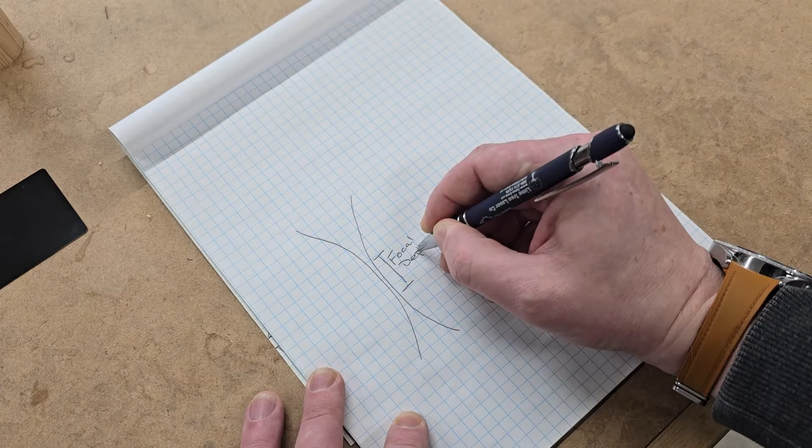Now, on a CO2 or a fiber laser, a non-3D, depending on your lens, this focal depth can actually be quite large. One thing we need to take into account is that with a UV laser, we have a very, very small focal depth. Now, with that small focal depth, we get an incredibly great level of detail, but we do need to remember that it is very easy to get out of focus with a UV laser.

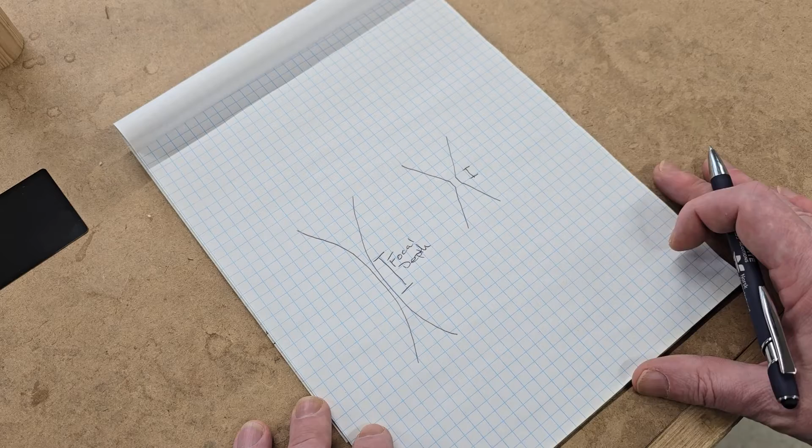On some materials, it doesn't make that much of a difference. On glass, this is critical - we have a very small focal depth, and we need to do absolutely everything we can to ensure that we're marking in the correct location. So that's just something I really wanted to quickly explain. I think most people do understand this, but hey, you never know. Some people might be buying a UV as their first laser, so this is something important to remember. We'll talk about it a bit more as we get to the laser, but just remember, when I say focal depth, this is the distance we're talking about here.

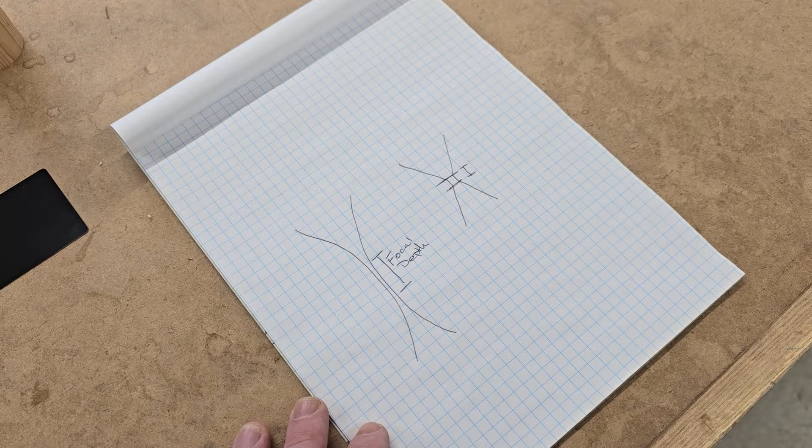Okay guys, hi, welcome to the video again. Let's get started here. We're going to start with something very simple - we're going to do the aluminum painted card that you may have received with your laser. If not, they're all over Amazon, very easy to find. It's a great way to really dive in and get your feet wet.

So first thing we're going to do here is, you'll notice we're working in our 200 by 200 millimeter workspace. We're going to do that for all three of these objects, so this entire video is going to be run on our 200 by 200. Now that gives us a 120 millimeter working depth - that's how much Z height we have to work with. We'll be doing everything at 0.

We don't really need to worry about working depth at the moment, we'll get into that. So let's get started - first thing we're going to do is import a graphic here.

And we've got a nice Haotian logo right here ready to go. We're going to resize it first - let's just do 50 millimeters by 57, that ought to work just fine. Anytime you're working in this software and you see an apply button, always hit that to double check on things.

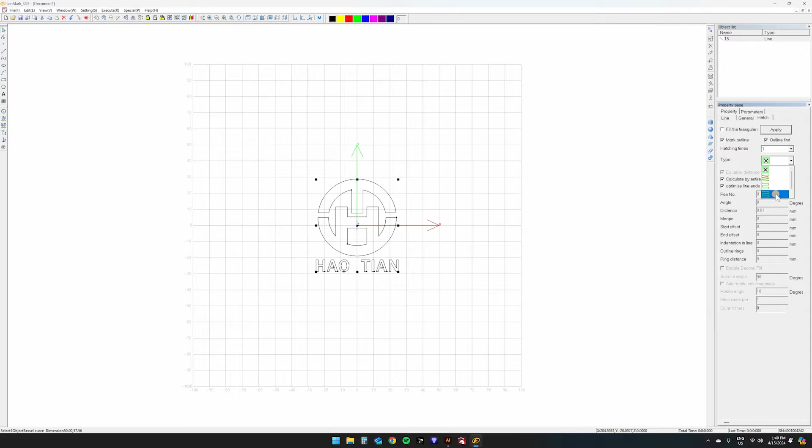Now I'm going to quickly set my parameters here, and then we'll talk about how to set it up properly. With this I'm going to do 2000 millimeters per second at a frequency of 60 and a pulse width of 95. I run my laser with an inverted pulse width, so that 100 is full power and 0 is no power. I think a lot of people don't use the inverted setting, so your numbers will likely be different. I just prefer it this way, it's easier for my smooth brain to figure out.

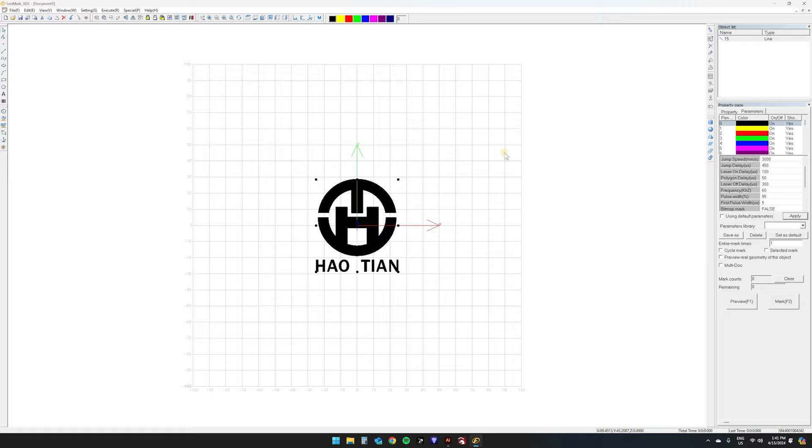On almost any other software not using a 3D laser, you'd think you're essentially ready to go now. We are not. Because we're using a 3D laser, if we rotate around, we can see that 120 millimeter working depth I was talking about before. The way these lasers work, we always want to start at the top and work down. You can technically do it from the bottom up, but I find that confusing, and focusing is a lot easier doing it this way.

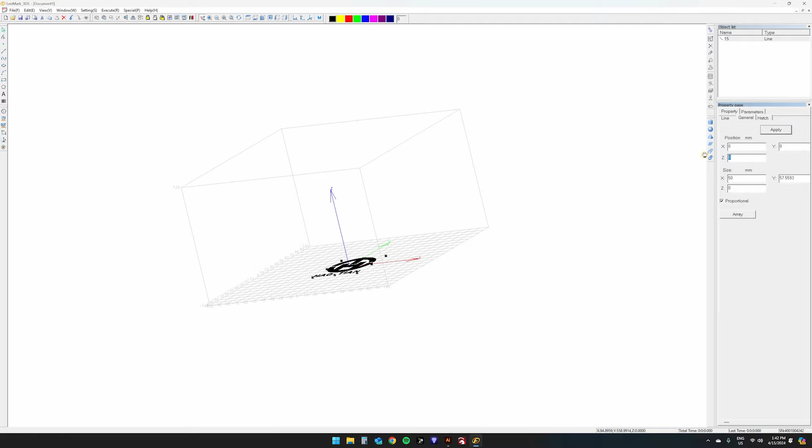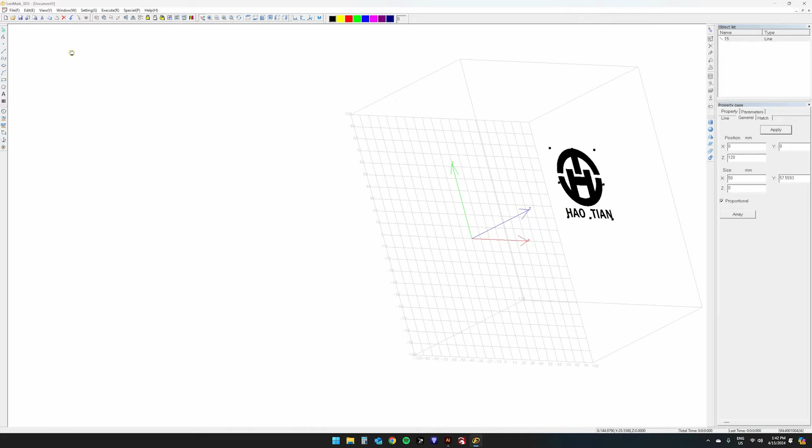So what we need to do is move our graphic all the way up to the top of our box, which we know is 120 millimeters. Let's go to our properties, into general, and set our Z height at 120 and hit apply. Now you can see we're right at the top there. So now when we focus, using the focus distance written on the side of the laser head, we can focus directly down to that highest point. On a card, the highest and lowest points are the same, but this is something you need to remember when we get into the 3D stuff, which we'll be doing right after this.

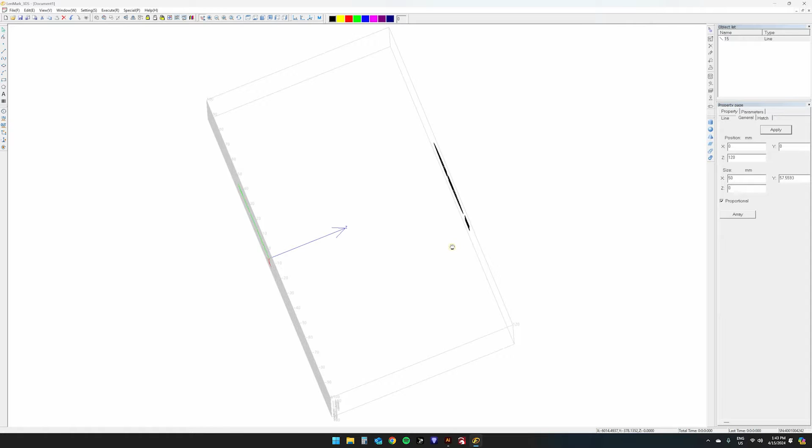So we're good to go. We've got our parameters set, we've got our hatch set, and we've moved the graphic in its Z height all the way up to 120 millimeters. So let's head over to the laser, focus it, and run this engraving.

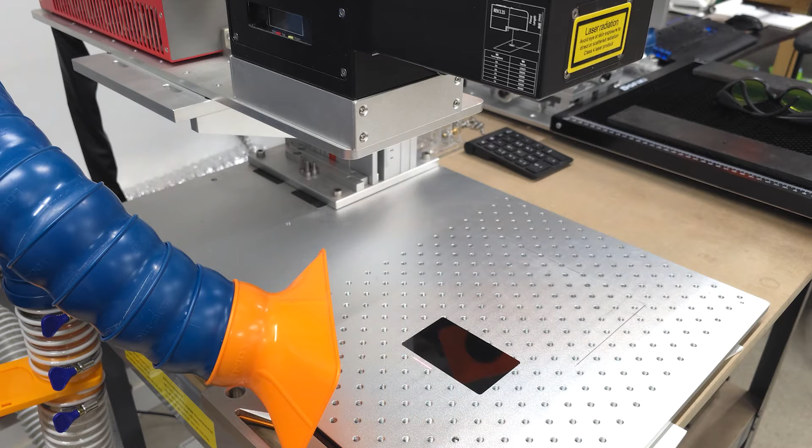Okay, we're at the laser. We have our card ready to go. First thing we need to do is focus our lens to the card. I use these focus sticks that I've made, I've got a few different styles. With this card, you can measure.

Why don't we show that? You will want to make yourself some focal sticks, because here we can move the card off to the side and measure up to our mark on the bottom of the head. When you're using a 3D object or glass that's going to be directly under the lens, it gets really difficult to use a measuring stick, so you'll want to make a focal stick for that.

We can reference our chart here for our measurement height, and our 200 by 200 workspace requires a 234 millimeter distance. I'm just going to move it to the front so I can see it a little better. 234, there we go.

Now you can see we have our outline. It's a little difficult to see on this black card. These gels can help quite a bit. I'll have to give Dean a big thank you for sending me this. I believe it's a photography flash gel, but they work great.

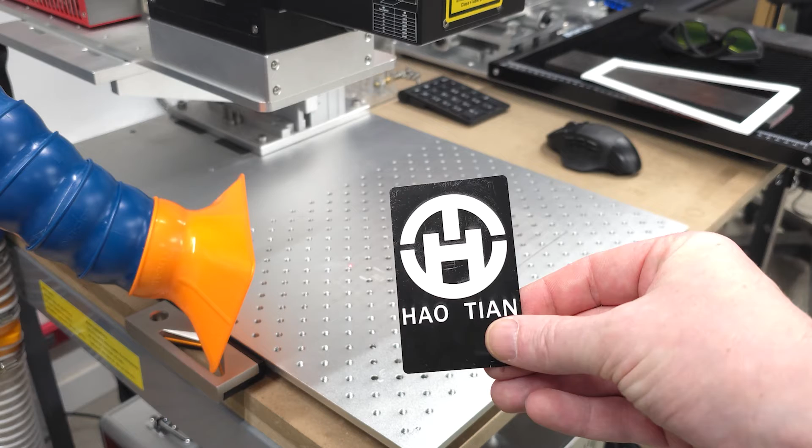Here we go. Pretty simple, not hard to do, like I said. Things do get a little trickier when we start moving into 3D objects, so why don't we do that. Congratulations, you've done your first engraving. Let's move on to the real fun stuff.

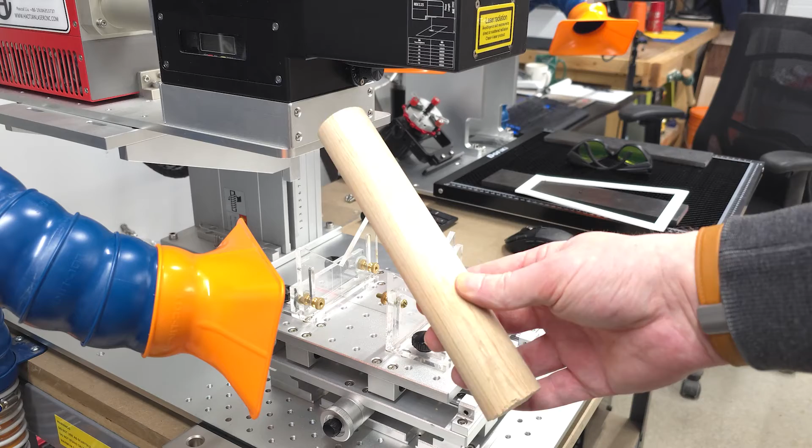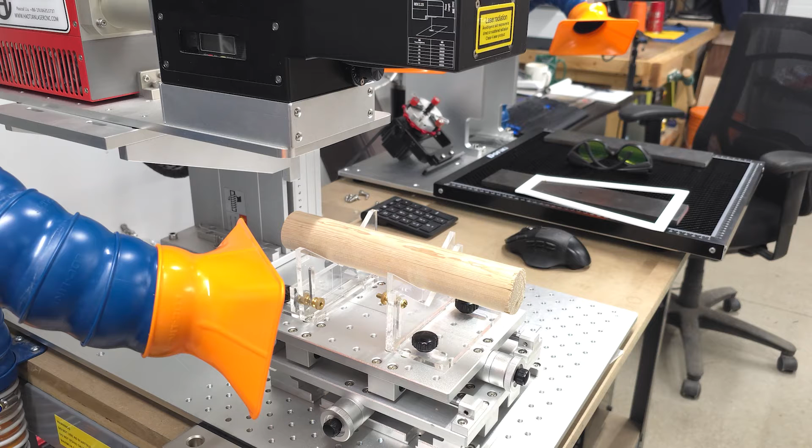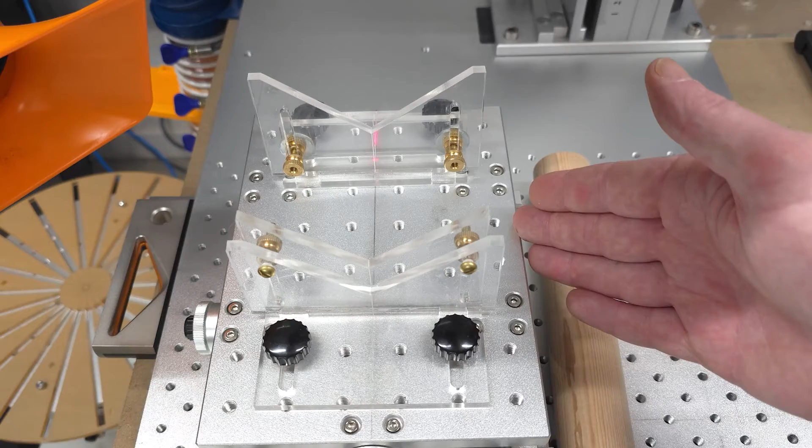Okay, moving on, next we're going to do a mark on this 1.5 inch diameter piece of hemlock dowel. Again, wood isn't quite as focal dependent as glass, so we've got a little leeway. But what I'd like to show you is that I'm going to be using this same jig setup for glass. You'll see I've got an XY table here, I've run a center line down it as well. You probably can't see them, but I do have center marks on the acrylic line here, and I simply projected a straight line and line-marked to line everything up with that.

We'll talk a little bit more about why that is so important with glass. Wood, it's not quite as detrimental, but it's a good practice to always make sure everything is as centered as possible when you're working with a 3D laser, and in particular glass. Like I said, we talked about that focal depth a little bit earlier, and with glass, that focal depth is extremely important.

So again, same thing we did before. We're going to focus the very top edge of our object to the lens, and this is where I say to use some kind of a focal stick. Again, I guess with this object, we can really pull it down a little bit and measure from there. Now, if this was not nearly this long and we needed it there, we can't really measure from there. So let's upgrade to our focal stick.

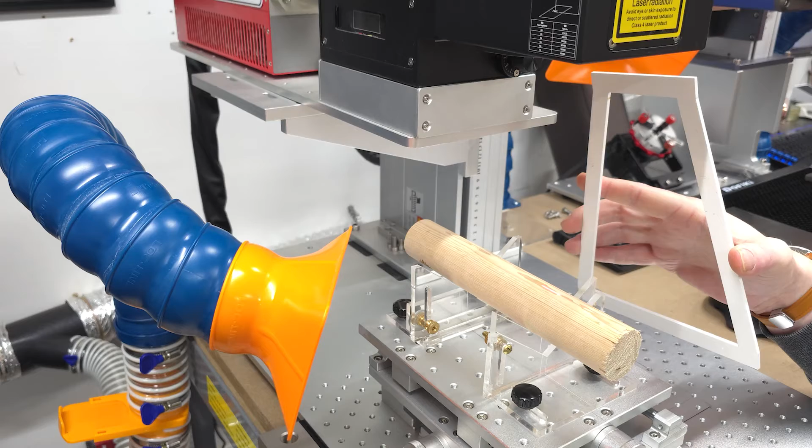Let's use that from the rest of this video. Move the head up. And focus to that top edge. There we go.

Now, I typically like to set my object in its place and get it ready to go before I move into the software. The reason for that is that you get a little bit better of an idea of your framing and everything. You want to make sure everything's in focus. It's very easy to hop over into the software, get everything set, start framing, and then things don't look right. And the reason for that is that you're not focused yet, and sizes will change when they're out of focus. So getting your object down, aligned, and focused first is just a good way to make sure that you don't skip a step later on.

So that's ready to go. Let's move back to the laser. Sorry, back to the computer.

Okay, here we are back in LenMark. I've just started a new document and just imported that same graphic. So let's get started again.

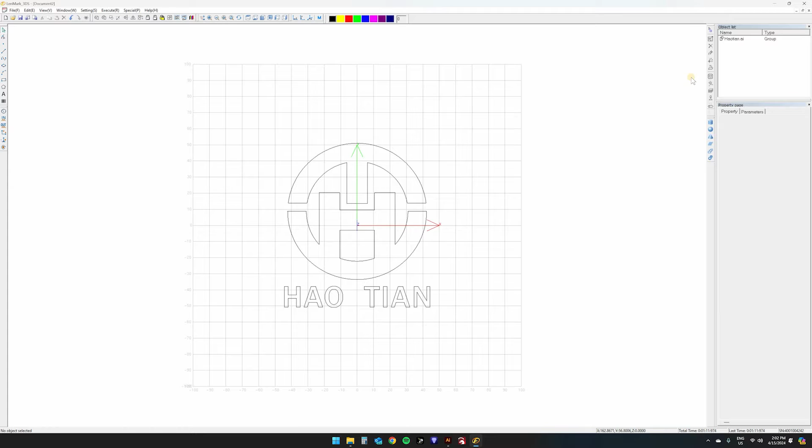First thing we need to do now is create a model to engrave on. We're using a cylinder, so we'll start with that. We're going to need a calculator because we're working in millimeters. So a simple cylinder.

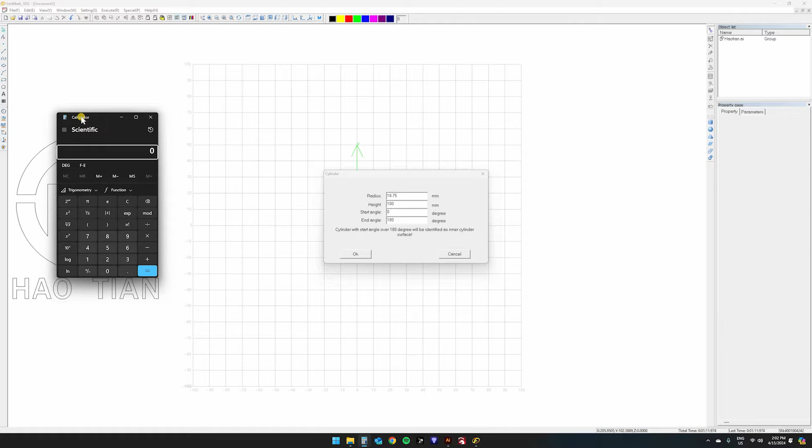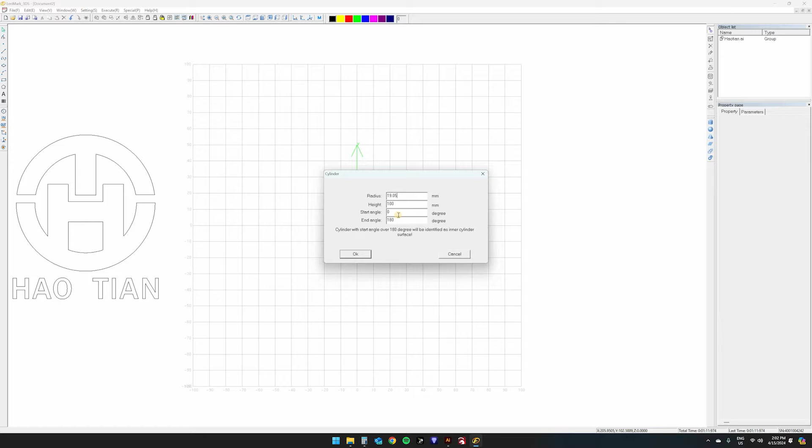Now, I said before that this was 1.5 inches. So let's get that into millimeters. That's 38.1. We'll divide that by 2 to get our radius, 19.05. For this particular object, our height doesn't really matter much. And I'll do a start at 0 and end at 180, so we only have half of a cylinder. There we are. That is our model that we will be projecting this graphic onto.

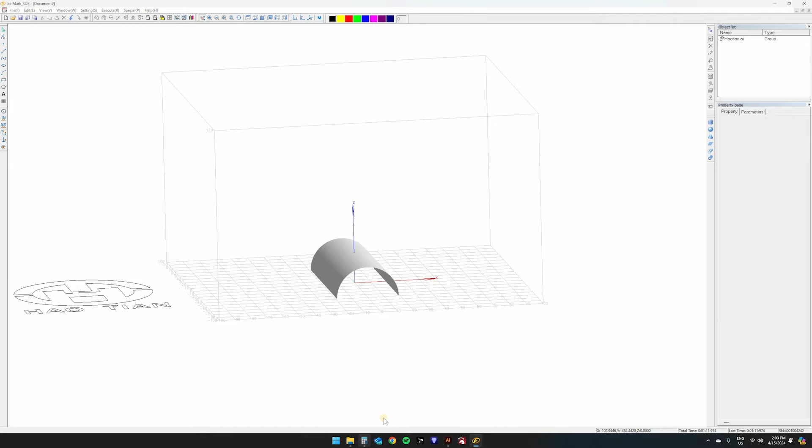Now, same thing. We need to move this up to the top of our working height. And we're going to have to put a little math into this one. Let's select it first. We can bring up our move window.

So we know our radius is 19.05. So let's just take 120, subtract 19.05. That gives us 100.95. That is the height we need to move this up to get it to the top. So we'll add that into our Z column. We'll click the relative position and hit OK.

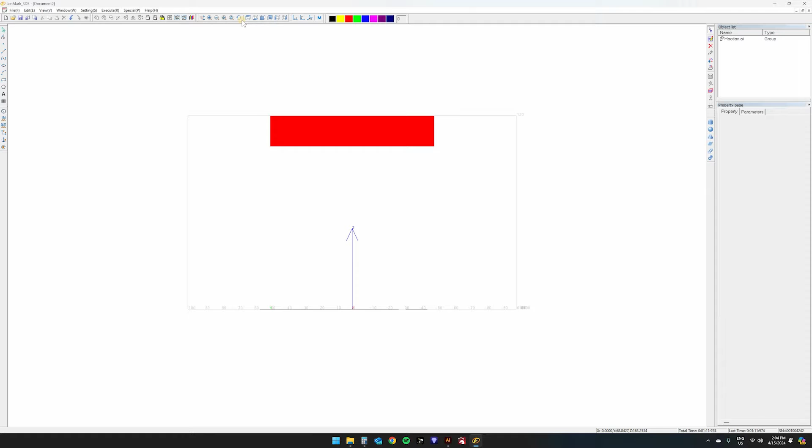Now we can choose a side view just to quickly verify that we did our math correct. The top of our cylinder is at the top of our working field. So we know that's good. Let's go back to our top view. We're going to select our graphic and bring it back down to the origin, which is 0x, 0y.

Now for placement, I usually like to bring it up to 120 so we can see it on top of our object. Obviously this is a little bit big, so why don't we move that down? Let's do, say, 75% of diameter.

So we have a 1.5 inch cylinder. We'll turn that into millimeters by multiplying by 25.4. So that gives us 38.1 as a diameter. And let's multiply that by 0.75. So that's a 75% diameter, which is a pretty common target for most cylinder engravings. That's 28.575.

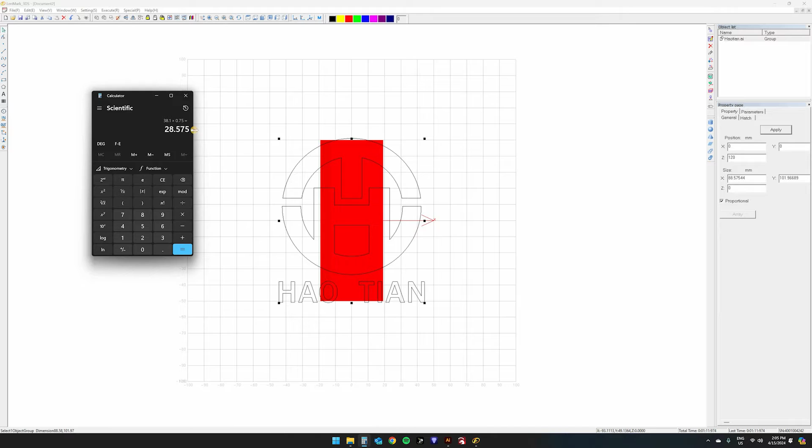So we'll resize this proportionally by that 28.575 and hit apply. That's looking pretty good.

Next thing we need to do is we need to hatch this. Again, I don't want an outline. I'm going to do a bidirectional hatch on this one. I find it works much better for wood. Again, all of the options selected, but this time we're going to do a 0.07 millimeter line distance.

There's a few schools of thought on this when doing 3D engraving. Some people like to do a 90-degree hatch, which would be this direction, so that the focusing lens, when you'll essentially be engraving the entire thing left to right, doesn't have to do as much work. It only really has to move in, then out, then back in.

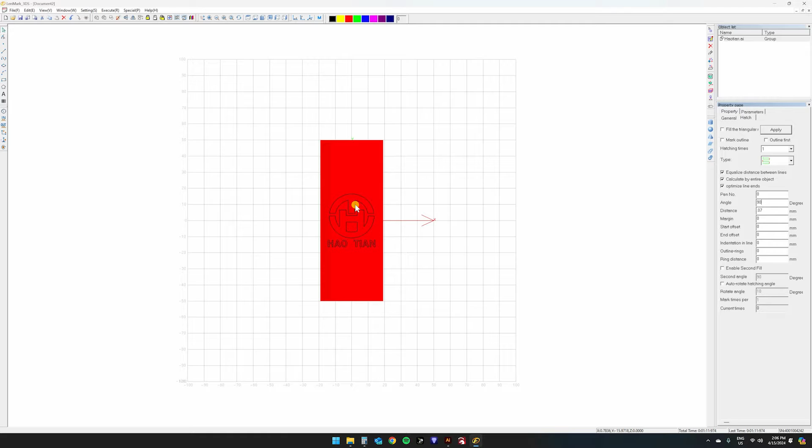If you're doing a 0 degree where you're moving, say, from bottom to top, your focusing lens on the head is going to be focusing in, out, in on every single path.

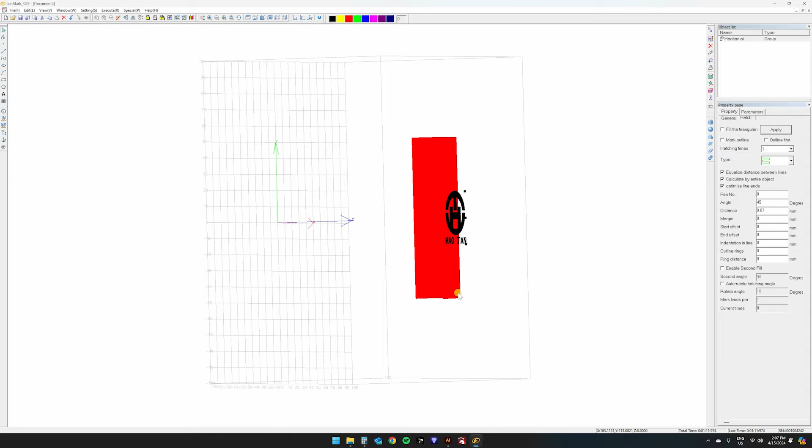Now, this is one of the common problems Mark has been seeing when we're projecting a graphic onto a cylinder. It's a little different when you're using these tools. You can actually project from that 120 height. When using imported models, you always have to have the graphic down at 0.

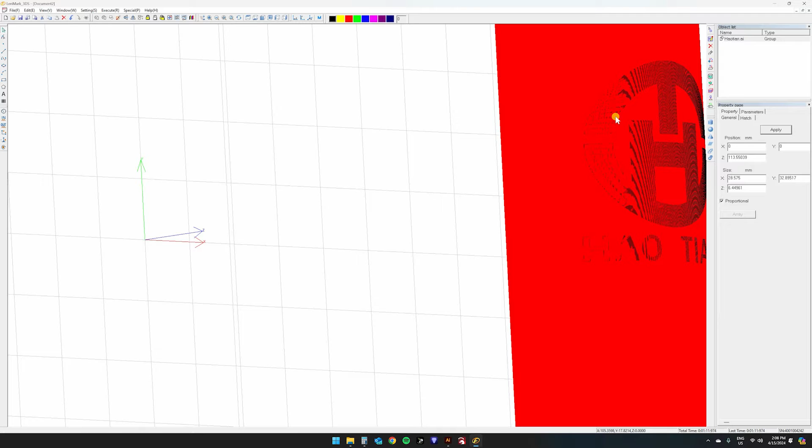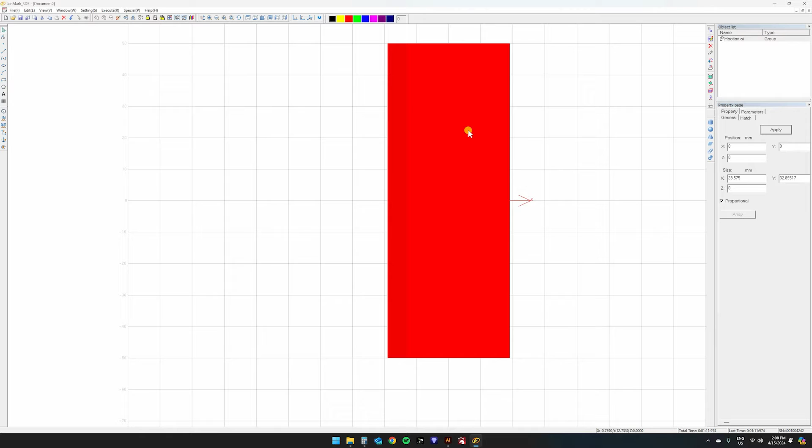And to be honest, whenever I'm doing a projection onto a 3D object, I always just start at 0 anyways. You can still use the wrap feature, or you can also use the straight projection, which will essentially—again, it's kind of hard to see—the difference is that this projection mode essentially projects it straight down. So you'll see, again it's kind of tough to see, but this is starting to stretch out from our original width up here. Whereas if we do the actual wrap, it's the same size. So essentially it's taking the graphic and shooting it straight down. So if you're looking at this object with your eye from this space, you will see that exact shape.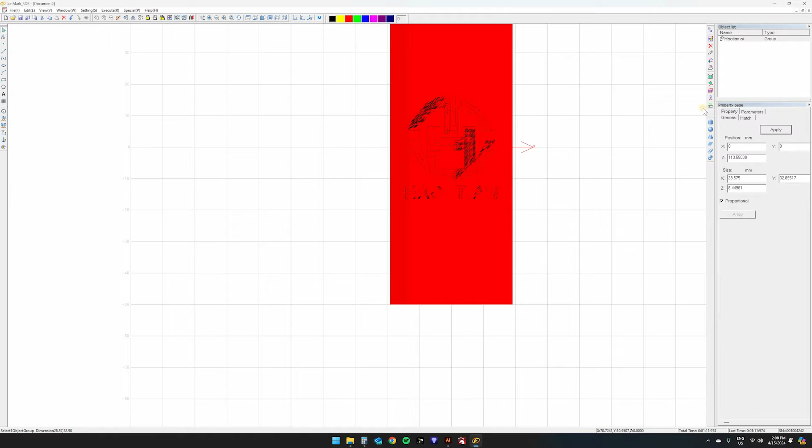So I'm sure a lot of you know that when we're doing circular objects on a wrap on a cylinder, we start to get that egg shape. So we correct that by stretching our circle out into an oval, so that when we engrave it, we actually have a circle when you're looking at it. This straight projection mode is essentially just doing that for us. And if you're using an imported model, you'll have to use that mode anyways. So I use it most of the time. Sometimes I don't—it really depends on what I'm doing.

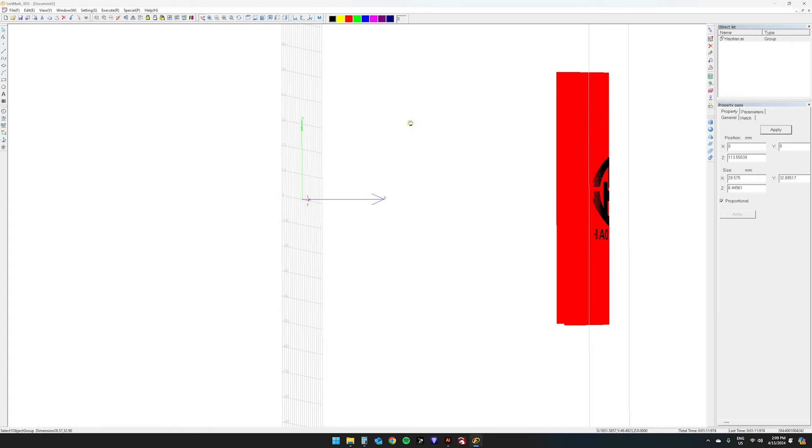So again, let's take a quick inventory. We've set our burn parameters of the Haotian logo here. We've projected it onto our cylinder. You can see it wrapping around. And we're also at the very top of our 120 mil working depth. So we are ready to go. Let's go back to the laser.

Okay, here we are. So again, we've already focused, we've already placed our object, we've got everything on the software set the way we want it. We can do a quick preview. Looks pretty good. Now I'm going to take this off of the tripod so we can get a better look at the actual engraving. Here we go. Let's fire away.

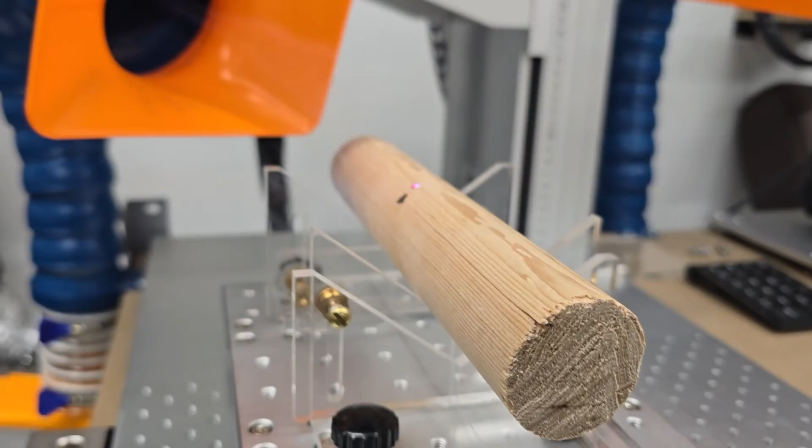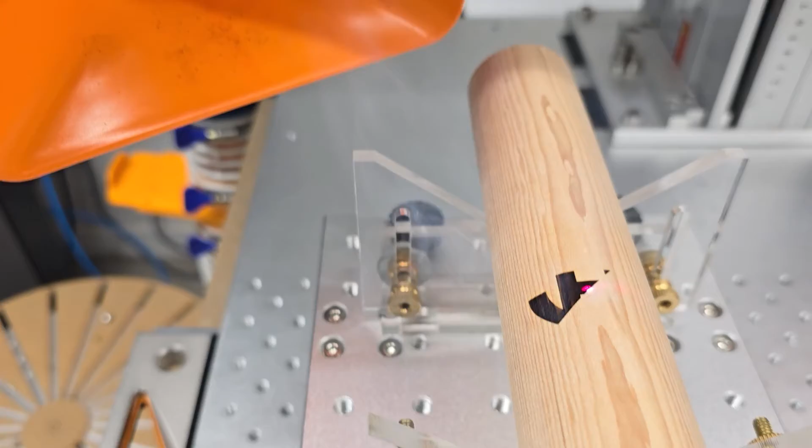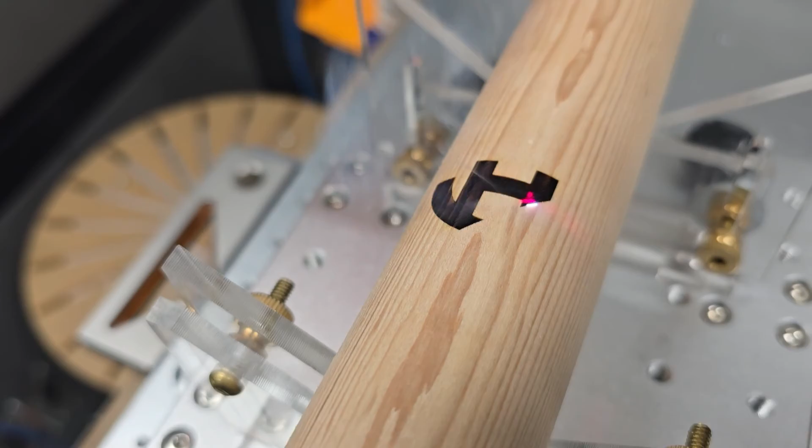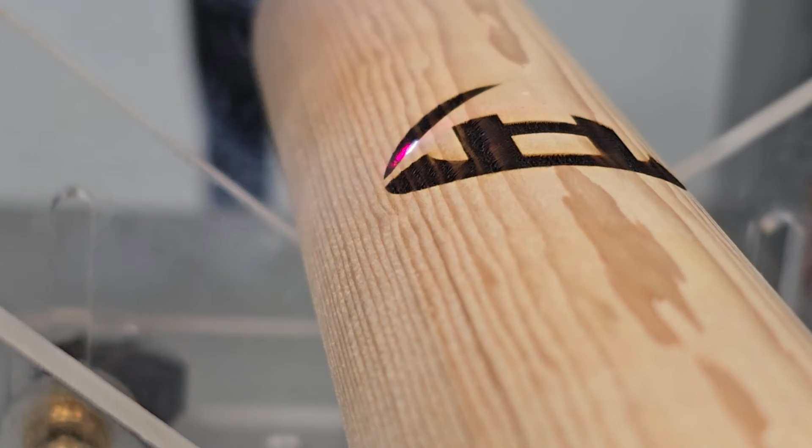Now again, I told you I like to go pretty slow with wood, but that beautiful black engraving is exactly why that could be tough to get with the CO2. I'm just starting to wrap around the other side now—get a proper focus. With wood, you really can go a lot further on the diameter, which is very easy to engrave with the UV laser.

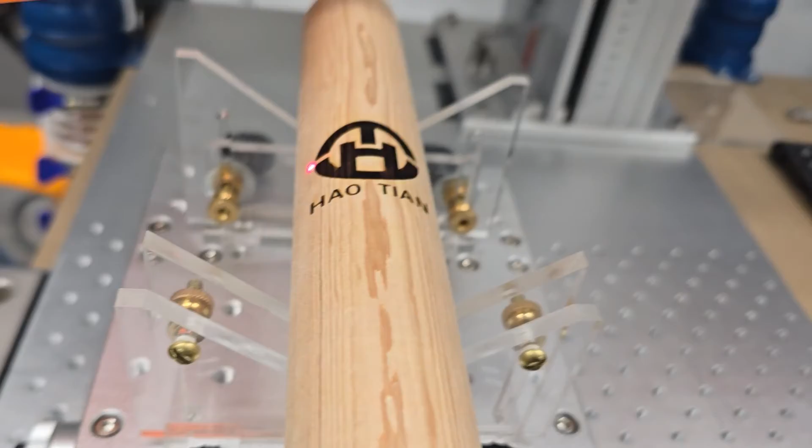Just a little bit of text left, and we're done. There we go, that's it. You can see we got that wrapped down. A little tough to focus, which is going to be a lot more fun to deal with when we do glass. You'll find out glass can be really tricky to try and video and engrave at the same time.

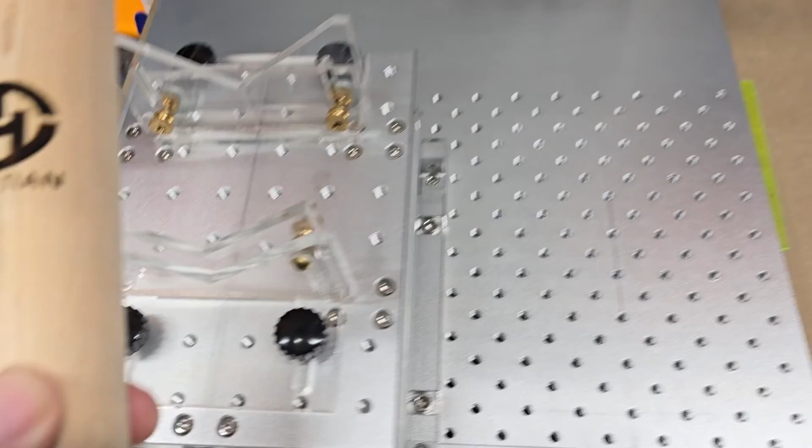Now here's what I'm talking about with those projection modes. You can see that the circle is actually quite a bit distorted when you're looking at it from the side. But if we look at it directly straight on, we have a perfect circle. So that's really just what that projection mode is doing. Again, play around with it.

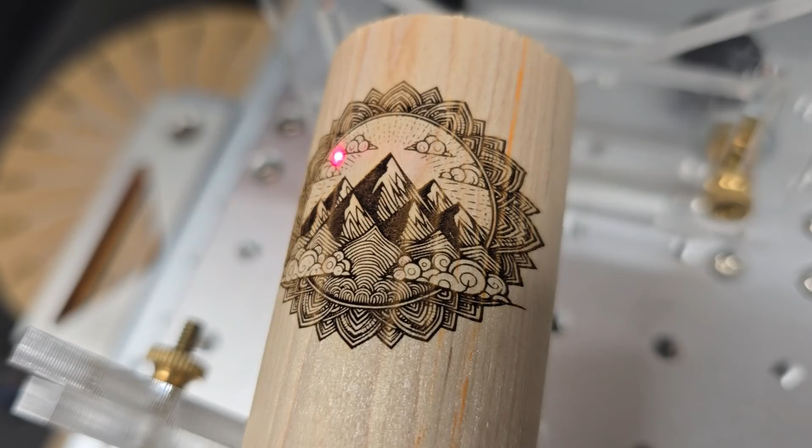So there we go. This dowel I just bought from Home Depot—actually it was in the trim section, so I was able to just cut off a couple of feet. It only cost me a couple of bucks. And I'm not going to lie, engraving these dowels is a whole lot of fun. Here's another engraving that I've done on it, and that really shows off the detail that the UV laser can get. It's the exact same process, same settings, same everything, just a different graphic.

So there we are. Congratulations—that may or may not be your first 3D engraving. If it is, good job, you're probably having a ton of fun right now. So let's move on to the real challenge. Glass can be tricky. It can be very tricky, and all of the things we've learned so far, we really need to take into account.

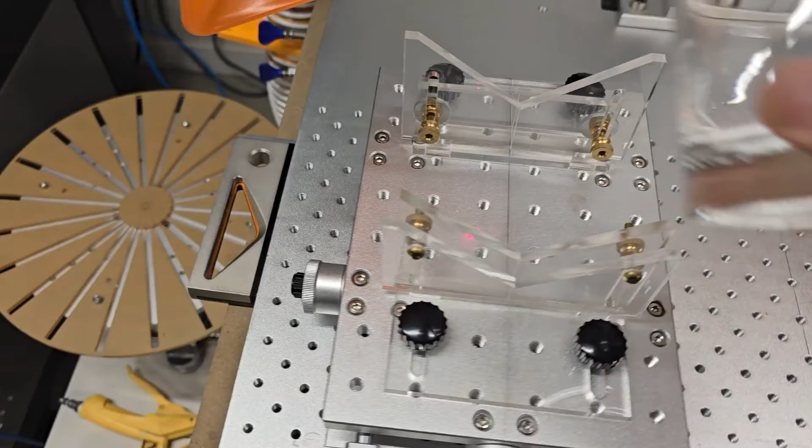Now, like I said, I'm going to be using this exact same jig for this glass. We're going to be doing a little bit different setup in the software, just a few extra steps, but we're still going to use cylinder.

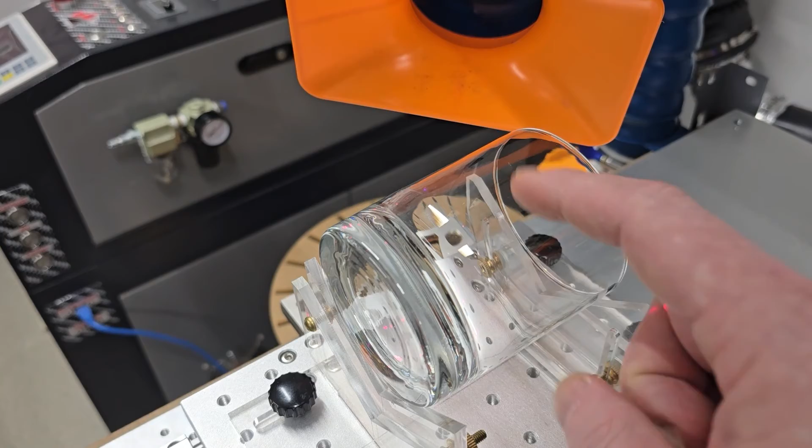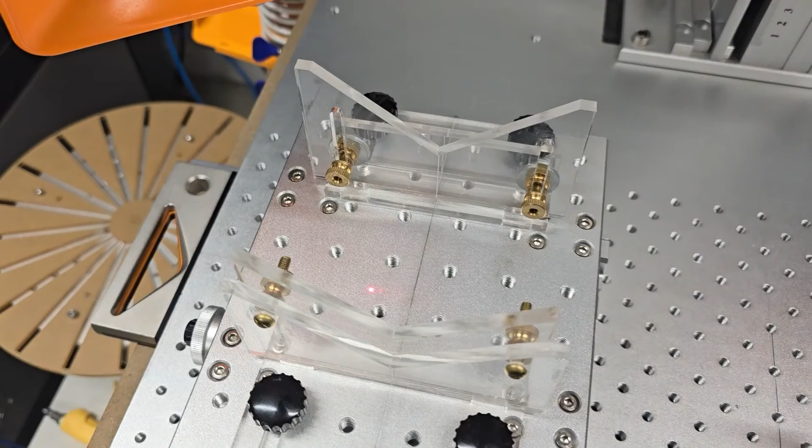Again, having your jig centered is critical. If you're using a proper cylinder, ensuring that this top is level is also critical. Now, I know that this is a cylindrical cup, and I know the height of these two standoffs are equal, so I know that this is level.

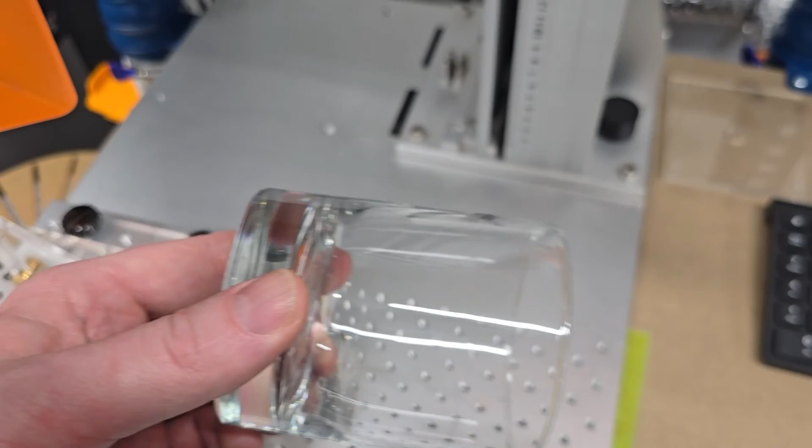Now, being level is only pertinent if this is a cylinder. If you have a tapered cup that has a smaller diameter at the bottom, we don't want that top level. We want to make sure the cup is straight. And there are many different ways to do that. You're going to have to find your own way.

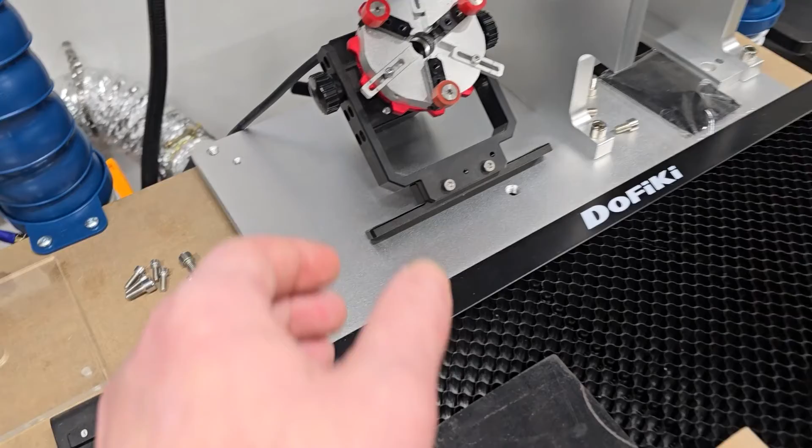I find using my grip rotary is a great way to keep things straight for tapered cups when doing glass. I don't actually use the rotary, I just use it to hold glass. But for cylinders, this works great.

Now I'll quickly pop this back into the tripod here. We're going to do the exact same thing. We're going to set our focus height, again with our focal stick.

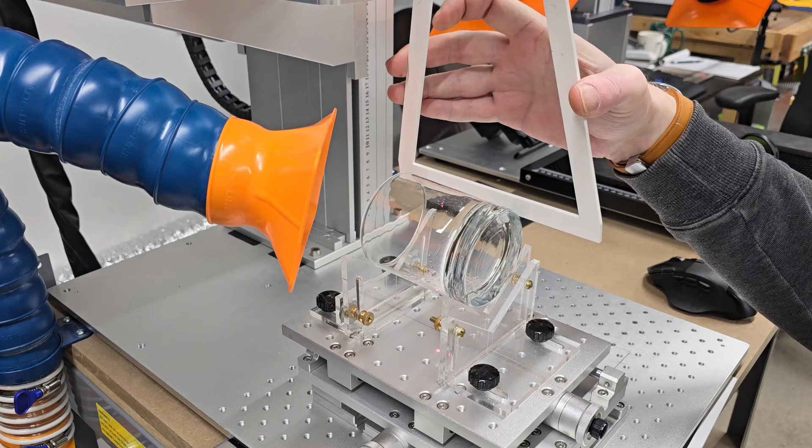Now, actually, I'm going to double check this because this is not looking like a true cylinder. It is not. There is quite a taper to that. So I'm going to reset. I'm going to set up with the grip rotary there, and we'll come right back.

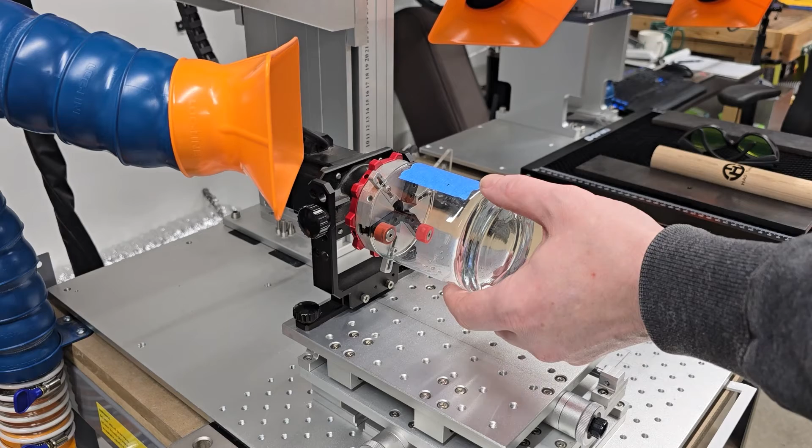Okay, we're back. So we've reset using our grip rotary. One thing I'd like to mention is that I have the head of my laser squared to this table. So what that means is that I can use my engineer square to ensure that the XY table is square to the table itself. And then I can also make sure that the rotary is square to the XY table. That's going to keep everything straight in both our X and Y directions.

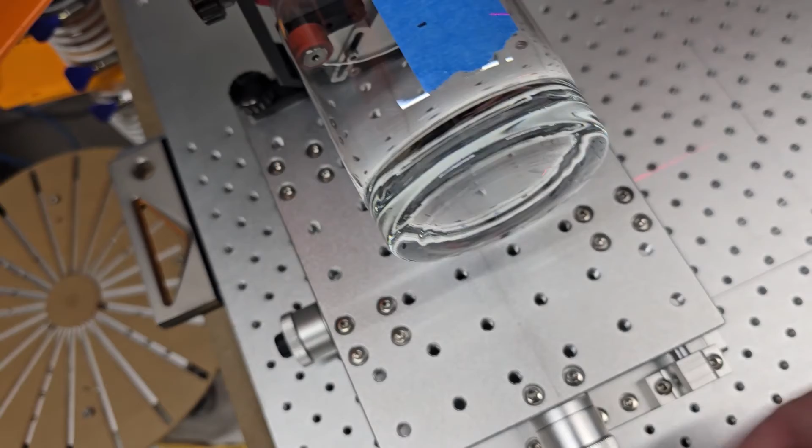Now, I know that this rotary is already centered in our X axis, but we do need to center the glass in our Y axis yet. So I just put a quick piece of tape onto the cup and mark its center line, and we're just going to move the XY table until our alignment cross lines up with that mark.

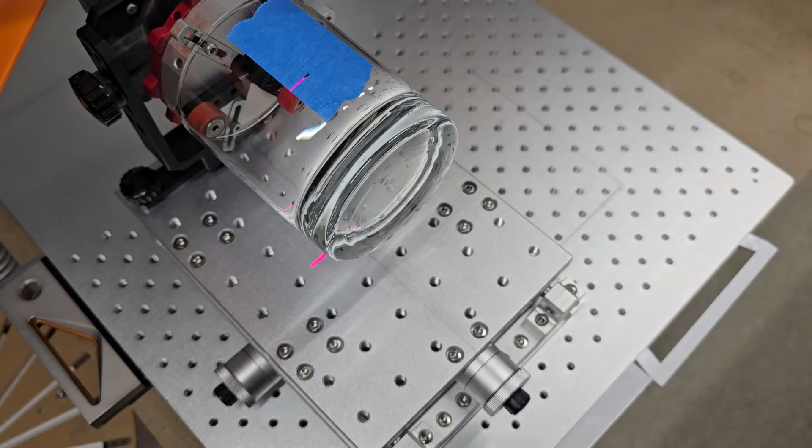So there we go. Our glass is centered in our X direction, it's centered in the Y direction, and let's remove this from the tripod again.

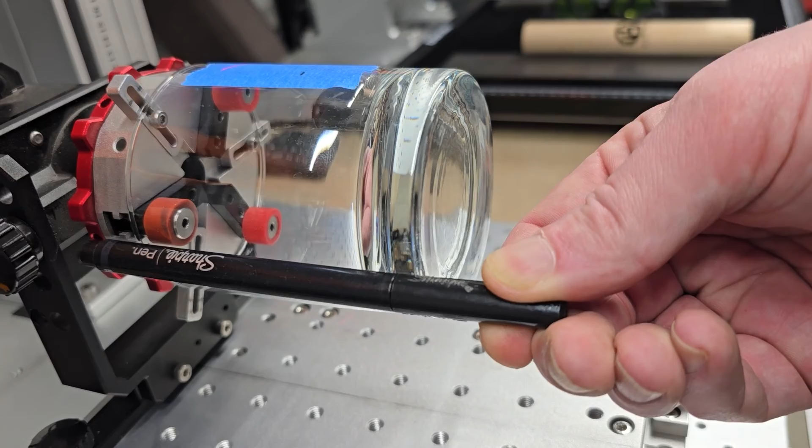This top edge surface is not level. The center line of the glass, better, the central axis of this glass, you can imagine going through the very bottom all the way through. This central axis is parallel to the table. That is the important thing with the UV laser. That's how our model is going to be set up.

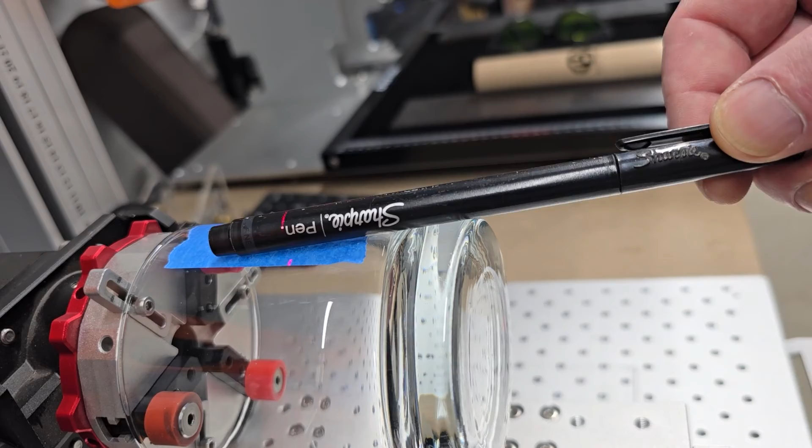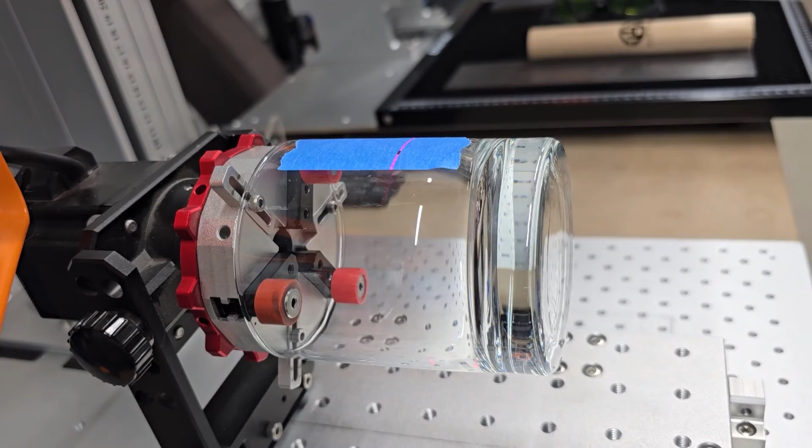If this top surface wasn't level, we also have to figure out how to rotate the model in our software to reflect that. That's a tricky process. I know this rotary is set up with a face square, which means that I know this central axis is also parallel to the table and will match our model in the software.

And again, we'll double check our focus to the highest edge, which will be at the top. There we go. Remove this piece of tape. All right, let's head back to the software and get this set up.

All right, guys, moving forward with our rocks glass engraving. So again, I've got a fresh file in Landmark. And the first thing we're going to do is create our cone. As I said, that glass did turn out to be tapered. Not by much, but it was tapered.

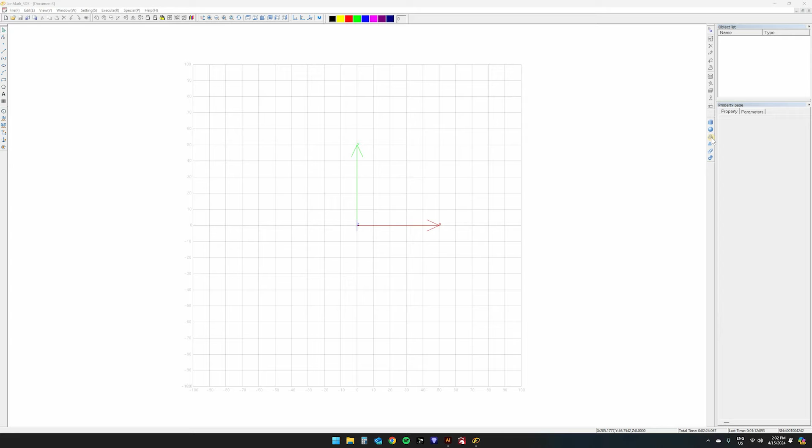And with the UV lasers, we have a very, very, very tight focal depth. And even though our top diameter and our bottom diameter are only 3 millimeters difference, that is enough that your engraving will fail. So take your time, make that proper cone, because that 3 millimeters, which is only a millimeter and a half in radius, it will make a difference.

Like I said, we're starting a cone here. Now I have my diameters, but we need radiuses, and as you know, your radius is half of your diameter. So we have a top diameter of 78, divided by 2 is a 39 millimeter radius for the top. The bottom we have a 75 millimeter diameter, divided by 2 is 37.5. And we have a height of 93.

We'll hit OK. There we go. We have our cone.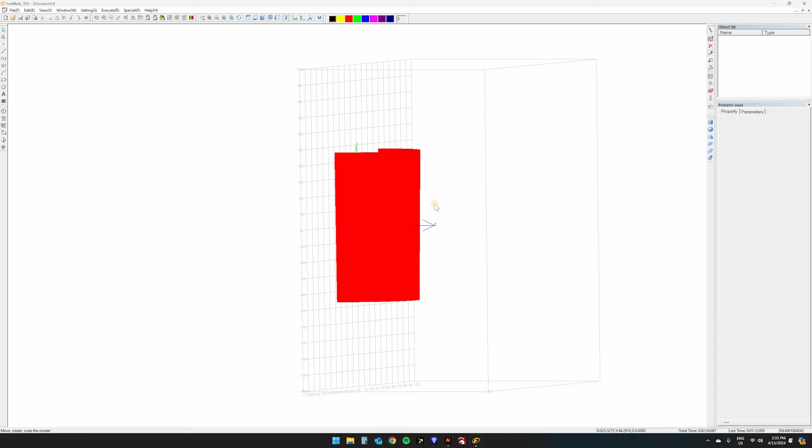So again, into the Z. I've already forgot what that was because I have the memory of a goldfish.

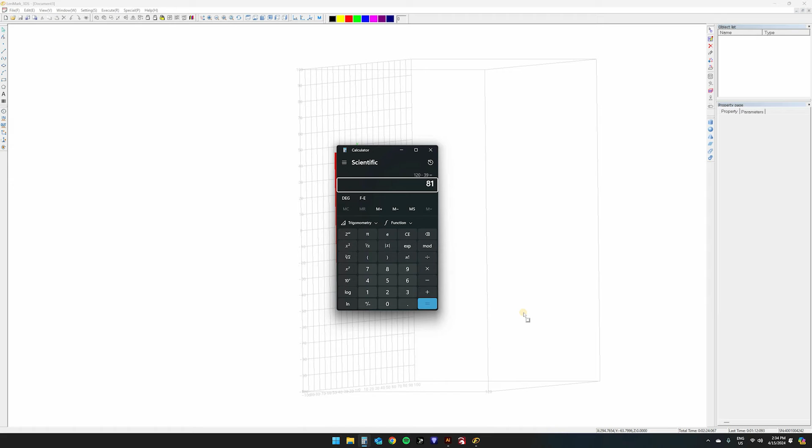Sorry about that. Top radius of 39, remember 81 this time. We are going to move that up by 81 millimeters relative. Again, you can do a side or back view to double check that the very top edge of your model is going to be at 120. So we're good to go. Our model is set.

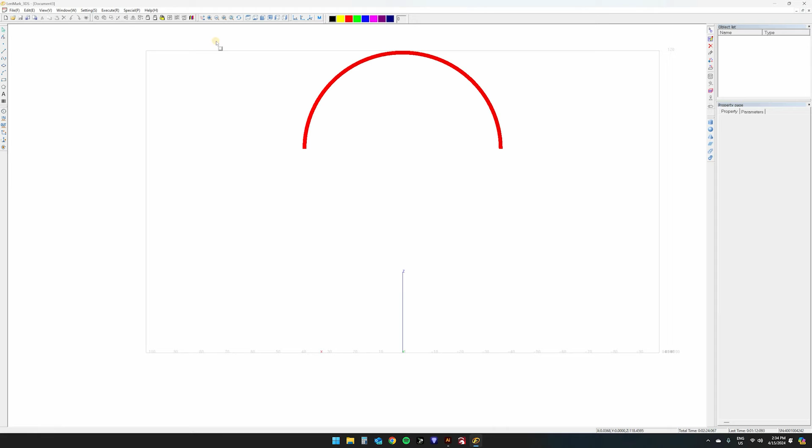So again, we'll import our Haotian logo, and again I like to always move it up to 120 so I can see what I'm doing. Now for this, we said we had a top diameter of 78. Let's target 70% for our width, so we'll multiply that by 0.7. That gives us a 54.6 millimeter width of the graphic I'd like to do. We'll just call that 54. We'll resize that in the X direction proportionally.

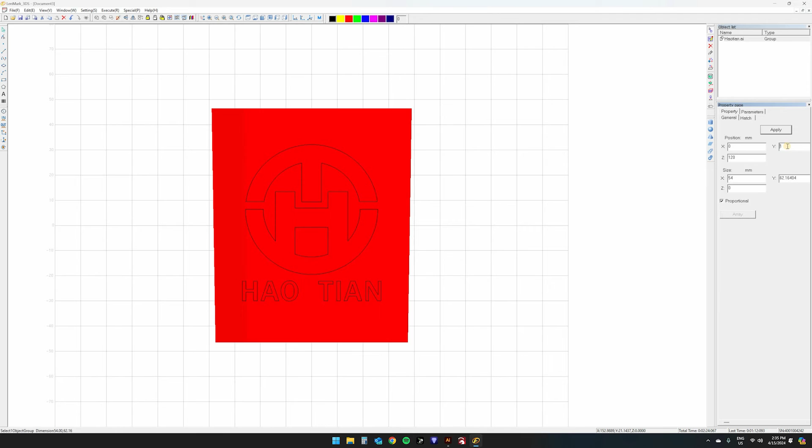We'll hit apply. Now this rocks glass has a very thick glass bottom, which is somewhere around here. We could actually measure it, but I'm not going to. What I'm saying is that it looks a little funny if you engrave over that thick glass bottom. So let's just move it up a little bit. I think that'll look quite nice there.

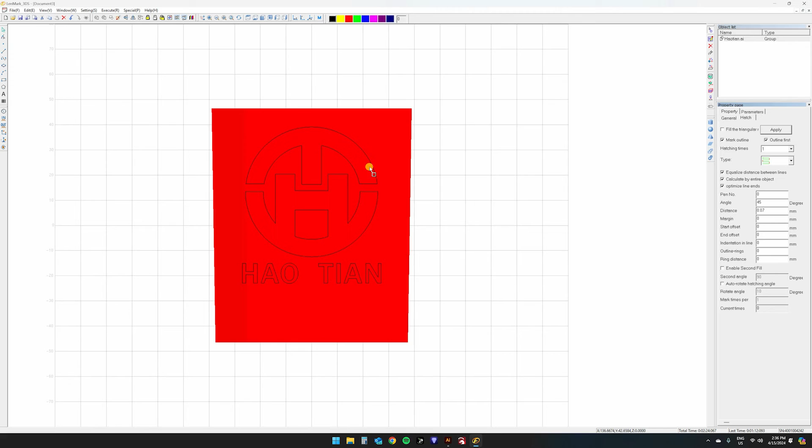Apply, and we'll move on to our hatch settings. For glass, I like to use bidirectional. And this I actually do like to do an outline, and I like to outline it first. Sometimes I find it just gets the laser firing a little quicker, and sometimes you'll get a bit of a lighter engraving on your first passes, so an outline seems to help with that. Again, all the optimization settings on. I also like to use a 45-degree angle for glass because we're still going to be moving quite slow. Use a 0.025 millimeter line distance and a single pass. So we'll hit apply on that.

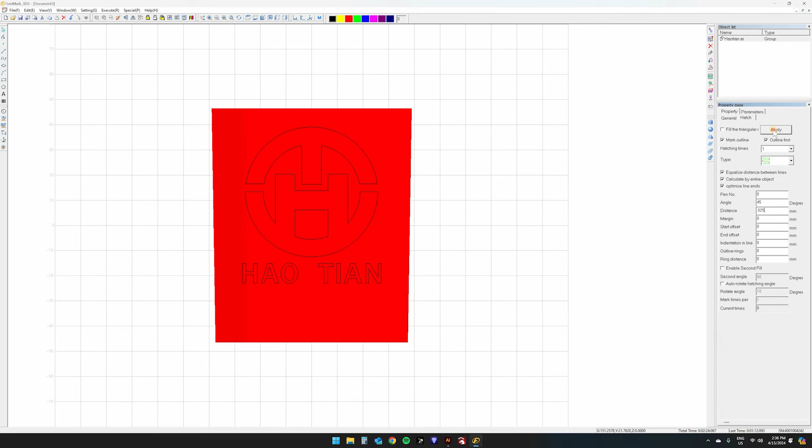Let's quickly move into our parameters again. For glass on a single pass, I like to run a 350 millimeters per second speed with a 45 frequency and pretty close to full power, 95. Again, I am using inverted power pulse width modulation, so 95 is almost full power for me. We'll hit apply on that.

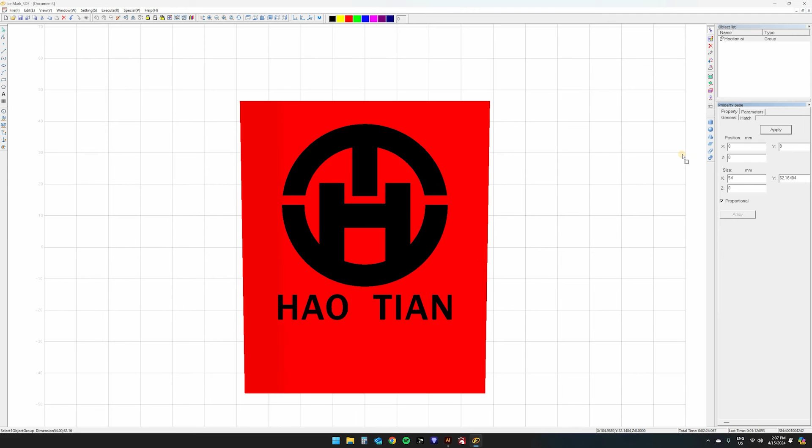Now again, we want to move this graphic back down to 0. And then because it is a circular logo, I like to use the straight projection. And those lines always look a little funny. This is just one of those oddities of LenMark. It kind of just is what it is. Sometimes things can look a little funny, but once you get to the engraving, it looks just fine.

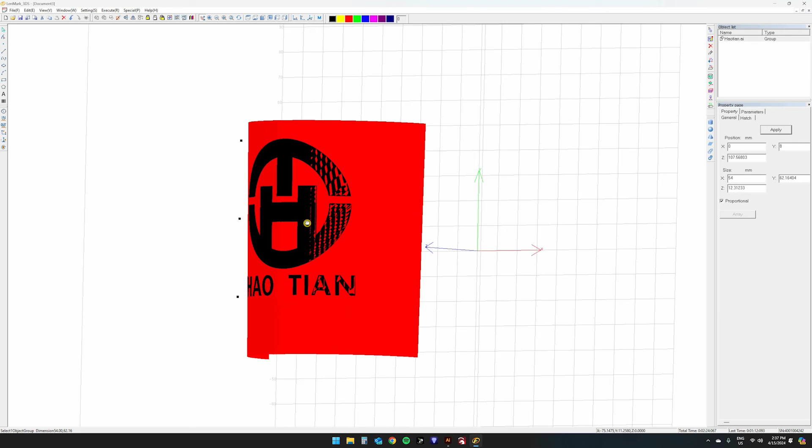So again, a quick little inventory. We've created our cone, our tapered glass. We've moved that up in the Z height. We've set our hatch and our engraving parameters the way we would like, and we've projected that graphic onto the model, which again has some strange lines, but we don't need to worry about that. Okay, back over to the laser. Let's fire this one.

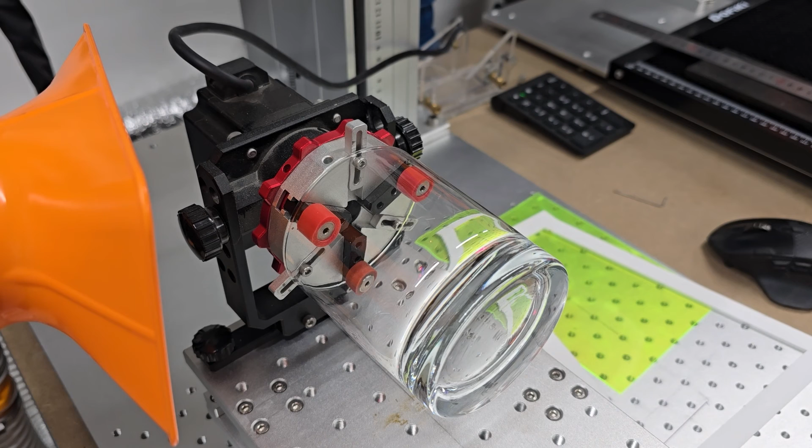Okay, so we're back at the laser. We had a little bit of problems on the last engrave, I'm not gonna lie. I know I was playing around with the 64 and 32-bit software, and some of my calibration got thrown out, so I have to make some few adjustments here. It did slow it down a little bit. And I do see there's some inconsistencies in the glass in this area, so I just decided that I'm going to run a crosshatch just on the test. Other than that, everything else is the same. Setup is the same, alignment is the same. The projection on the software is the same. So we'll run this. Here we go.

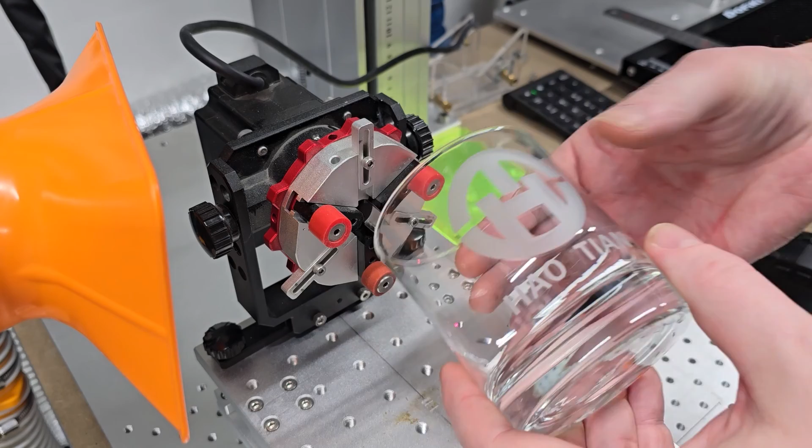Okay, there we have it. Nice little Haotian rocks glass with a nice frosty engraving there. So again, on glass, things can be tricky. Take your time, make sure everything is square, straight, aligned, focused, leveled, that your model is correct and accurate in the software. And don't get frustrated, because it does take some time to get the knack of it.

So that's it. I hope you enjoyed the video. Hopefully you learned some stuff. And if this is the first time you've used a Fieldtech Haotian 3D UV laser, congratulations.